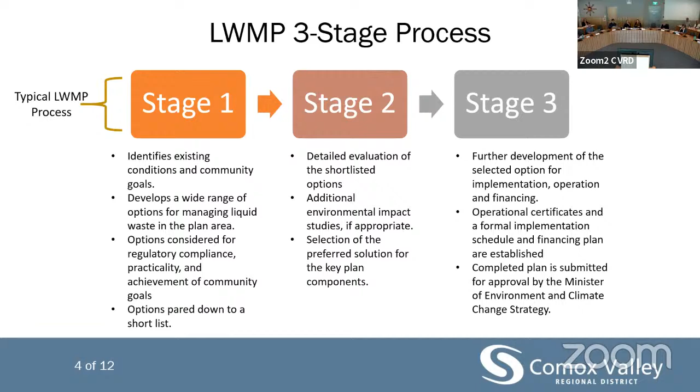All right, so if you look at the liquid waste management plan, who is involved? Who are the key role players? It's set up with 3 main committees: the steering committee, the public advisory committee, and the technical advisory committee. In a lot of cases, the public and technical advisory committees are combined and handled at the same time, like we are doing at this point, and it was also done like that for the CVSC liquid waste management plan.

So the steering committee first - it guides and receives all the information from the advisory committees and makes recommendations to the local government. On the CVSS liquid waste management project, the previous one, or the one currently underway, the steering committee was the Comox Valley Sewage Commission. And on the sewer extension south, which is this addendum project, the CVRD Electoral Area Service Committee will be the steering committee.

The public advisory committee - at the end we will discuss the terms of reference for this public advisory and the technical advisory committee, so I'm not going to expand too much on that since we're dealing with it later. In essence, the public advisory committee represents the community, the stakeholders, and the rights holders - everybody that is involved or impacted and needs to have a say. We need to hear you, understand your needs, and channel this in the right direction for the project. Then the technical advisory committee provides input on the regulatory and technical requirements - that's a lot of engineers and municipality staff involved. But again, we'll go into the terms of reference for that to give more detail.

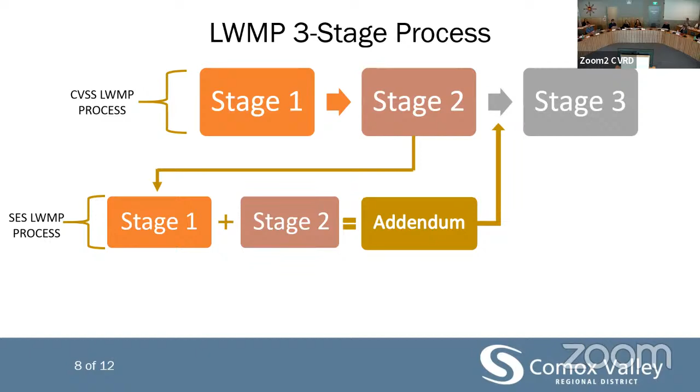If we look at this slide, stage 1 was the same up to the red line.

Now we will start with this addendum, expanding the CVSS service area to include a portion of electoral area A, and development of the addendum to stage 1 and 2 CVSS liquid waste management process, following provincial guidelines, including involvement of the TAC. Once we go through this, we move to stage 3, where we include the sewer extension liquid waste management addendum for stages 1 and 2 with the previous report, and then the whole process moves on to stage 3.

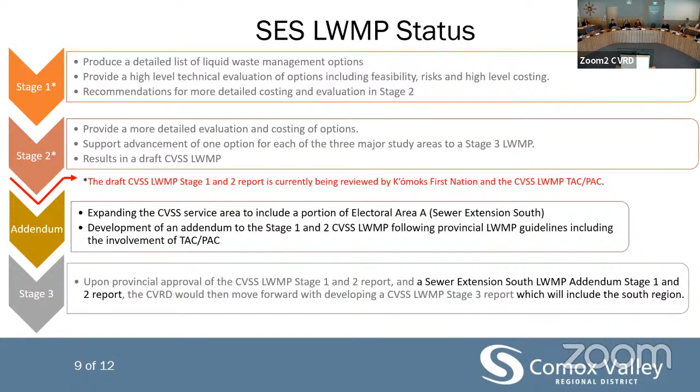In your typical liquid waste management process, there are certain components that you need to address. The guidelines are very clear on what needs to happen. There's been discussion with the ministry, and there are some items we won't cover because we are only doing a force main and a pump station. We are not doing anything on the wastewater treatment side because that has already been handled — we're busy with that separately, so it's not needed here.

So the planning components we will not discuss in this process: reclaimed water has been dealt with; combined sewer and sanitary overflows have been dealt with in the previous liquid waste management process; the wastewater treatment plant as a whole has been worked through in detail previously; same for stormwater, and the integrated resource recovery — all dealt with in the previous process. So there's no need for this, because the addendum process does not influence it. These are the only items from the ministry's whole list that we will not need to address in this report specifically.

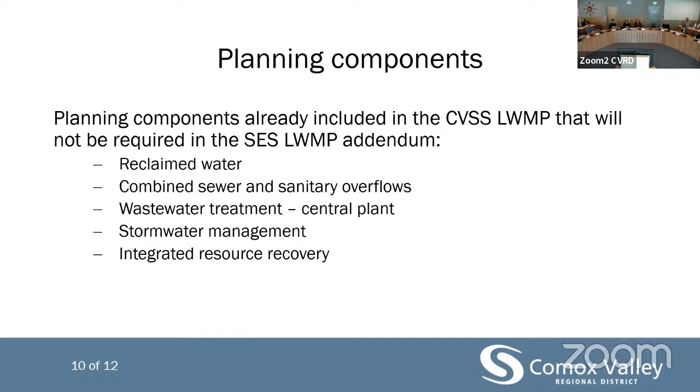I think that is my last slide on the general layout of the liquid waste management process and where we fit into the CVSS and the sewer extension addendum process.

Listen if there's any questions. Yes, I have a question. So in this addendum to the South Sewer, or the CV, whatever it is, we talk about identifying alternatives. Is that precluded from this aspect of the liquid waste management plan because it's an addendum, or are you still looking at alternatives for South Sewer?

So I can take that, Ian, if you want. Jim, as you might remember, we've gone through a previous liquid waste management process, which Mikkel will be talking about a bit today, which did identify a long list of options, and a shortlisted option was selected for servicing the south area. So we're going to build on that work and the work that's happened since, in terms of the agreement to expand the service area by the board, focusing on this concept for regional sewer service to the south. That said, we will be looking at options for how that service may be provided in terms of phasing, collection system design, and otherwise.

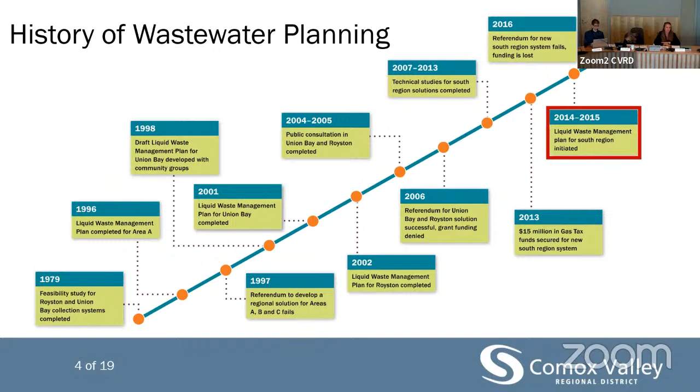In the context of a liquid waste management plan, we have to look at the applicable regulations for wastewater treatment. There's two aspects to that - a provincial aspect and a federal one. From the provincial point of view, we have the Municipal Wastewater Regulation, which came out in 2012. In addition, and a bit unique to Vancouver Island, there's also the Vancouver Island Phosphorus In-Stream Objective - specific, higher treatment levels applicable to any discharge of treated effluent into streams or rivers on Vancouver Island. Then there's the federal regulations for wastewater treatment, under the Wastewater Systems Effluent Regulation, the most recent one coming out in 2015. Now, these two regulations are similar, but not the same - there are nuances to the differences between them. The point is, whatever preferred option is established here does need to meet both the federal and the provincial regulations.

So in looking at wastewater treatment for the South Region, one of the places we start is how much wastewater are we going to be producing, over what's the design horizon for this wastewater treatment system, and what kind of wastewater strength do we anticipate.

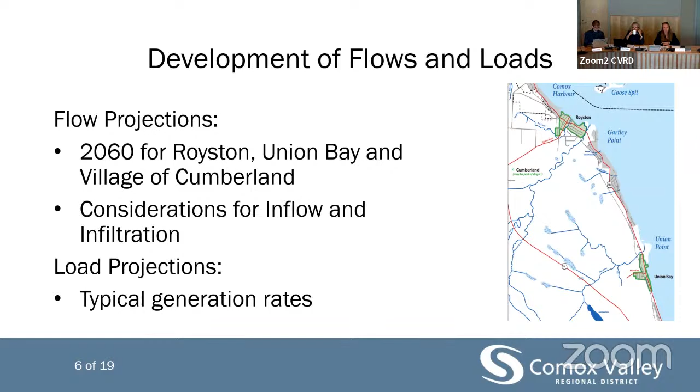In addition to that, one of the other aspects associated with the liquid waste management plan is undertaking an environmental impact study. This is typically a two-stage process, a bit confusing because it's separate from the stage 1, stage 2 process for the liquid waste management plan. The idea was to look at the different discharge options and how the environment is considered in these different scenarios. Now, the stage 1, stage 2 work was not actually carried out or completed, and I'll get into that a little bit.

But what is important to highlight is there were a number of other environmental investigations that were undertaken to support some of our options development and some of our scenario evaluations.

So like I said earlier, and you would have heard as well from Ian, a big component of liquid waste management plans are the advisory committees and the public outreach component. We did have the K'ómoks First Nation as a partner at the time. In terms of public outreach, we had 3 open houses carried out between 2014 and 2015. They included poster boards, newsletters, surveys, that kind of thing - really an opportunity to get feedback and help inform the committee. And similar to this committee here, some of you even sat on that, we had a combined TAC PAC committee, and five meetings were carried out.

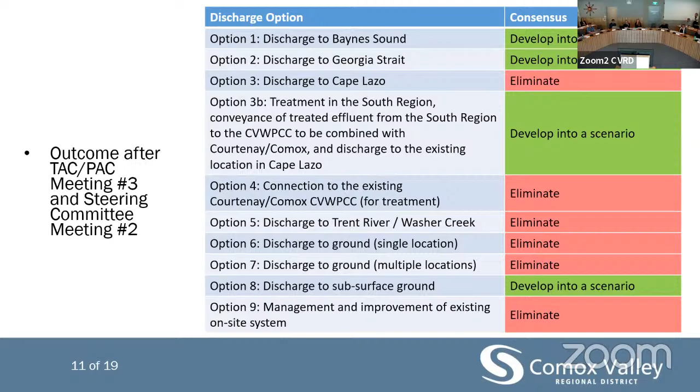Okay, I'll keep going. So like I said, we started with 9. We ended up with 4 options here. I'll just show you on a graphic where they're located.

So Baynes Sound was developed into scenario A. Then we had scenario B, which was discharge to Georgia Strait. That one goes east of the Comox Bar and just over Sandy Island Park. And then scenario C was Cape Lazo, essentially the same treatment location as where the existing outfall is from the existing wastewater treatment plant.

And then scenario D was not into any water body. It was actually still on land.

So we developed these scenarios and then we undertook what's called a triple bottom line analysis. This is a defendable approach to comparing different options. And the reason we're looking at a triple bottom line is we're considering environmental aspects, economic aspects, and social license around these options.

So for instance, from an environmental point of view, we looked at considerations like greenhouse gas emissions or disturbance to sensitive ecosystems, and how that differs between the different scenarios.

From an economic point of view, we looked at what's the initial capital cost that would be associated with a given scenario, and then we also looked at what's the life cycle cost over a certain operating time period.

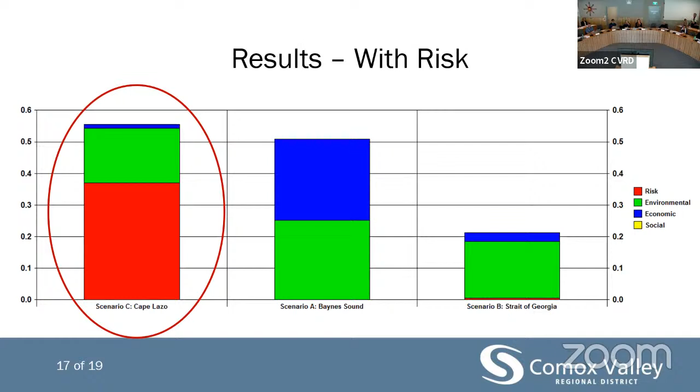Similarly with Scenario B. So what we found, through this triple bottom line plus risk analysis, was that Scenario C, discharge to Cape Lazo, had the highest score. The committee then, by consensus, decided to put that one forward as the preferred option.

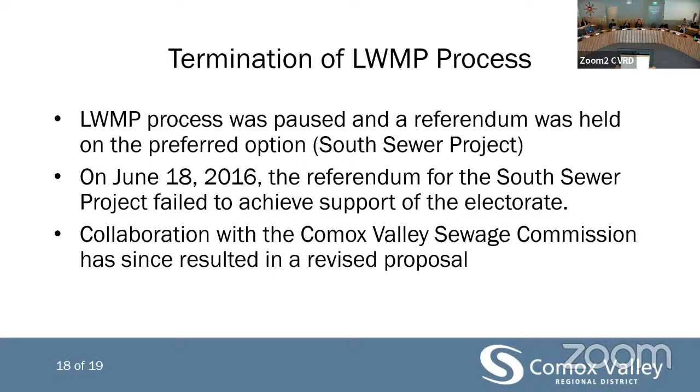So the liquid waste management plan process was paused in 2015, and a referendum was held on that preferred option, Scenario C. In June 2016, the referendum failed to achieve support of the electorate. Since then, collaboration with the Comox Valley Sewage Commission has resulted in this revised proposal, which is what WSP is working on here. I think that concludes my presentation.

Super, thanks so much. Questions? I have one question where you talked about truck traffic as being one of the downfalls of the scenario. How many trucks a day were you thinking would be leaving a South Regional facility to haul solids?

So what we found was, even though one scenario was say 5 trucks and the other was 6, the scoring skewed it so that one had the highest score and the other the lowest. The committee felt it wasn't really worth looking at the specifics of generated truck traffic. But wastewater treatment produces solids, and solids need to be taken somewhere. At the time, with the treatment being considered, solids were envisioned to be taken off-site and transported to the Skyrocket facility. If I may add, I know the current facility, Cape Lazo, is roughly 2 trucks a day servicing a considerably greater population.

So I'm just wondering where that 5 truck number came from. That was a totally made up number. I do not recall the actual estimate that we had developed at the time. Derry, I don't know if you do. Okay.

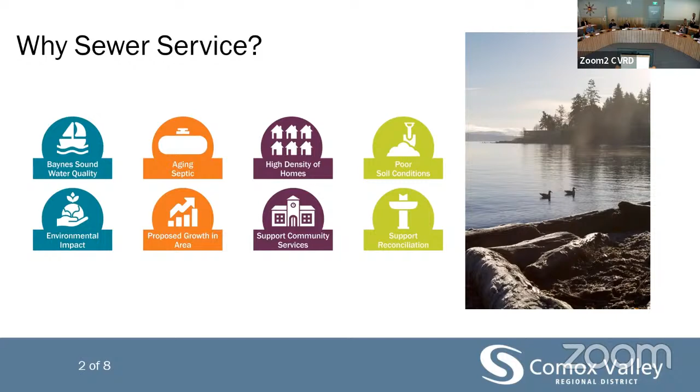In February of 2021, the CVRD and Comox ratified a community benefit agreement, which commits both parties to working together collaboratively on a regional sewer service for the area. This agreement provides for much needed upgrades to the Courtenay-Comox sewer infrastructure, while also supporting growth and economic development plans for the Comox community. Comox has and is anticipated to acquire through treaty significant land holdings in the south, and servicing these lands is very important for Comox in building capacity towards independent government.

The extension of sewer services south also supports the protection of the natural environment of Baynes Sound and will ensure safe access for Comox to shellfish for food, social, and ceremonial purposes. So, a very important project.

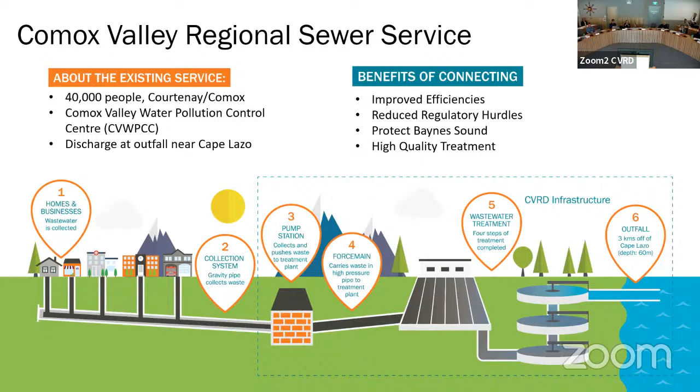As well, regional service provides access to a permitted wastewater treatment plant without a new outfall or impact to Baynes Sound, which we've heard was very important through the last process. This really simplifies permitting and authorizations for the project without the need for a new authorization for discharge, and also provides access to high quality wastewater treatment.

Just a little bit about the comparison of community sewer versus septic. For community sewer, all wastewater is collected from local homes and businesses, and in this case would be conveyed into the existing regional system for secondary treatment prior to marine discharge. Future plans for the Comox Valley sewage system also include UV disinfection, which we'll be discussing later in the meeting. There are also qualified professional operators that can be reached 24/7 and are very good at their jobs operating and maintaining the system.

For septic systems, we see varying levels of treatment with effluent returned to the ground at each property. Regular maintenance of septic systems is very important and is required through regulation. At minimum, property owners should be pumping out their septic tanks every 3 to 5 years, and for the more advanced type 2 and 3 treatment systems, annual maintenance is required. However, there's really no oversight body that's looking to ensure this maintenance is taking place.

If septic systems aren't maintained properly, they can really pose a risk to public health and the environment. The communities of Royston and Union Bay are also long established neighborhoods. Recent analysis of the health authority records showed that, like I said, many of these properties have systems that predate the early 1970 introduction of provincial septic regulations.

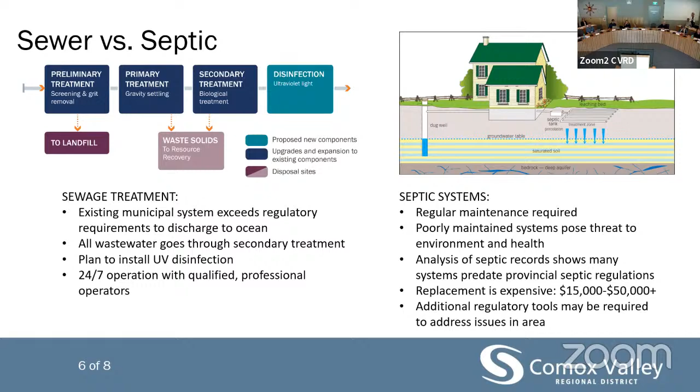So just a very quick overview of the Sewer Extension South project. Really, the intention of this liquid waste management plan addendum process is to include consideration of the Sewer Extension South project within the context of that overall Comox Valley sewer service liquid waste management plan. And as we've heard, this addendum process will be informed by this committee as well as First Nations and the public.

I know we're going to get into the details of the project concepts and the options available at the next meeting, but generally, the Sewer Extension South project includes a 13-kilometer sewer force main, shown in gray on the map, connecting Union Bay to Courtenay, as well as local collection systems and pump stations to discharge wastewater into that force main. The project is anticipated to be constructed in phases to ensure costs remain reasonable, with expansion potential for future development.

That's all I have. Questions? Derry, could you just go back to that last line?

I just have a question. Where does the current force main go to? The current force main is shown in the darker line, going essentially to West Courtenay. It currently follows the foreshore, but as we know, there's a new project underway to reroute part of that force main.

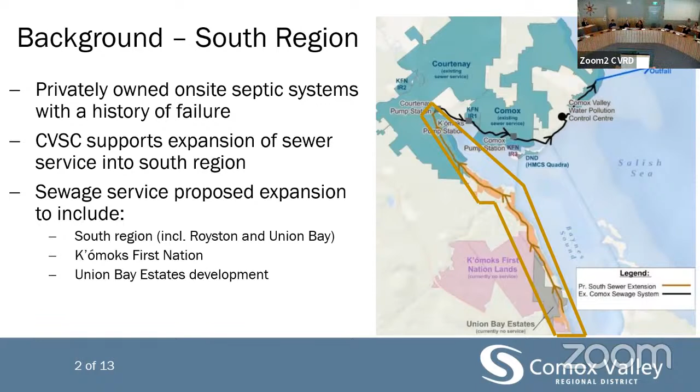All right, so if we look to start up a project, the first thing you need to know, if you don't have historic data, is you start with looking at the population. You need to go look at what the population was in the last census, or what the potential is for properties being built up, and make some assumptions on that to decide how to get to a future capacity. That's where the decision is, do we look at a 20-year horizon or a 50-year horizon? Where are we working towards? Because every time we get new information, every time there's a new census, we get more updated information.

For example, Union Bay gets an updated master plan, we know what is going on, and then we can work on it. So this is an ever-evolving system to see what your population is and what your future expansion looks like. So if you look at what we have currently, the idea on the wastewater side is to have it upgraded up to 2070. This has a 50-year design, and also just up to 2040 for the 20-year projection.

With the information we have, we looked at high, medium, and low growth scenarios spanned over the area. So we looked at Royston with historic information, Royston, Gartley, Kilmarnock, Union Bay - that was all a low growth scenario, 0.5% increase. Then there was Union Bay growth based on the McElhanney Kensington Union Bay Estate Sewer Master Plan 2019, more updated figures so we can adapt and add this information into the master plan, and that gives us the population like we see on the screen.

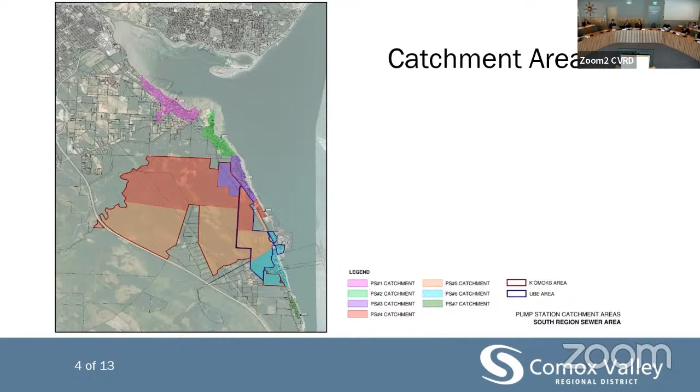All right, on this next slide, if you look at flows - touched on this previously - when you look at your typical wastewater flows, when we size a pump station or a force main, we look at a combination of these flows. The first important one is average dry weather flow, the flow we expect every day to come in. Over 24 hours, this is your flow with minimal infiltration, nothing much happening - this is your typical day, this is the flow that's coming in. That is your average dry weather flow.

Then you get a peak dry weather flow - that's the peak sanitary flow during a typical dry weather day. Every day, especially twice a day, you expect a peak factor in the morning, depending on the size of the town. If it's a small population, between 7 and 9 o'clock you'll get a peak flow because everybody wakes up, takes a shower, and you get a spike. So all of a sudden you get this peak dry weather flow. Then after everybody gets to work and showers again around 8 o'clock, depending on the area, you get another spike. That's called the peak dry weather flow.

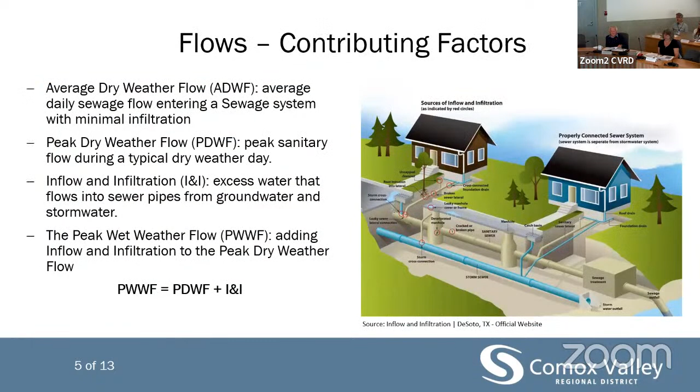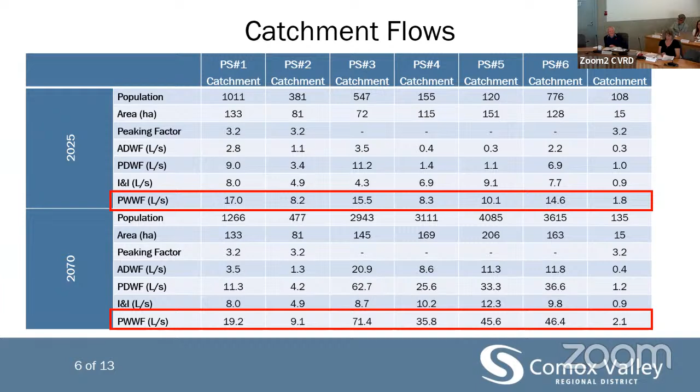On the inflow and infiltration, the ideal that CVRD is pushing very hard towards is to have a separate system. So the intensity of the rainfall should not impact the amount of inflow and infiltration, because we should have clear dirty water separation. All the rain events, the massive stormwater events, need to be dealt with on the stormwater side. We just make the minimum provision for flows into our sewage network, so that a lot of that is dealt with on the stormwater side to channel it away. We don't actually want that into our system.

And that is, once again, for the inflow and infiltration, we're only looking at a burst pipe that's cracked, or somebody that did a wrong connection, someone illegally pumping into the sewage that shouldn't be doing that. That should actually be policed better, and looked at on that side. So on the sewage side we shouldn't expect that much of a big event in terms of a flooding event.

Our pump stations should be sized at a level higher than the stormwater expected flood conditions. At this point we're looking at submersible pumps, so the sewage can still be contained within it and pumped away even though the whole area is flooded. So it's trying to prevent and minimize that.

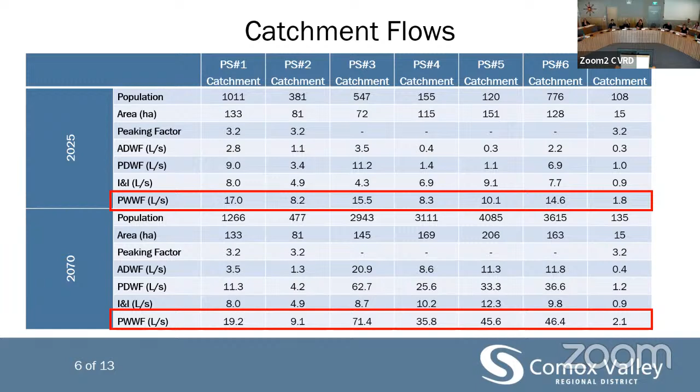All right, Ken, I was now waiting for your chemical side on these ones more. I was preparing more for questions from you on this slide, but all right. So Miguel also touched on what are we looking at a wastewater treatment site. Okay, so now we've seen the amount of the population, we've seen the flow and what provision is being made for.

Now, if we look at our wastewater treatment works, I'm first going to give you an idea of some terminology that is used. If we look at currently how wastewater treatment works, some of the main factors are its size. So you have the flow component - some of the equipment, some of the structures like your clarifiers, your physical processes, that is all sized on flow, the amount of flow we get, the peaks, all of that is sized. Then our reactor, our heart, our secondary process, that is based on the organic load. So to quantify that organic load, we look at various things prescribed by the federal government and the municipal government.

One of the terms you will always hear when you look at a wastewater treatment work is BOD5, the biochemical oxygen demand. It's basically the displacement of dissolved oxygen - a test they do to see how much oxygen is displaced. That's one of the tests. Then the other one is the total suspended solids in the wastewater, the actual fine material that you have in the water. And then there's the total Kjeldahl nitrogen, the TKN, which estimates the amount of organic nitrogen and ammonia that you have in your wastewater treatment works.

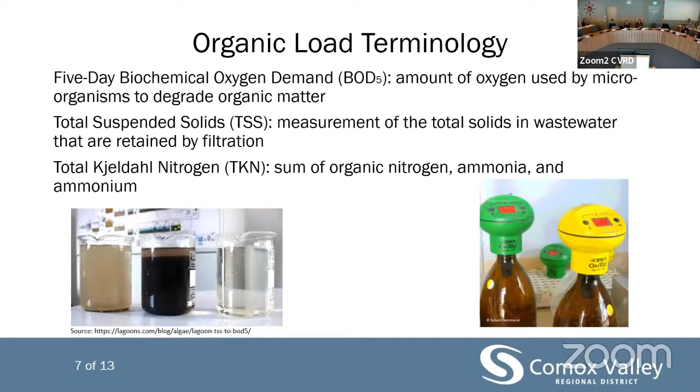So that was quite a mouthful, but our assumptions for the contribution to the wastewater treatment works are based on the CVSC's liquid waste management plan. They looked at data from 2013 to 2019, I think 2020 was also included. They looked at the average contribution of BOD - we measure BOD for each person connected to the sewage system, as they add BOD to the system. That's how it's measured.

So we measure it in BOD and TSS, and we work it back to per capita. They measured it every day for a year, got the total inflow BOD, then divided by the population to get grams per capita per day. We just used that same assumption to add it to the flow for the South region as well.

So we said, we looked at 79 grams per capita per day on average, with a maximum peak of 127 - that's just a short peak that you look for. And then the average TSS at 94 grams per capita per day. And then on the max, what's the contribution?

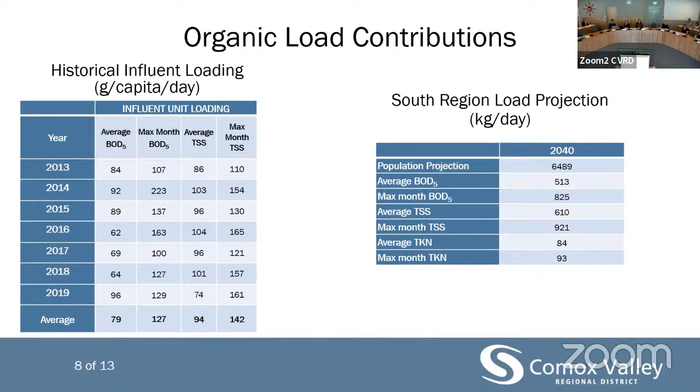Now if we look at the provisions made by the CVSC liquid waste management plan for the South extended sewer, we all worked on the same assumptions. At the point when this was done, in stage one around 2018, they didn't have all the information. So as you get more information, you update your population growth rate and all of that information.

So that's what we used. This shows what they made provision for on the conveyance system for the CVSC liquid waste management plan, looking up to 2040. Initially they made provision for 5,798 people, and our projections with an updated projected flow is 6,489 - that's a difference of 691.

So the 600 person difference in 20 years' time is very small - just assumptions we use to get that. If you look at the difference, it's about 11% in 2040 just for the south flow, but if you look at the entire system, the 60,448 they're expecting in 2040, it's only a 1.2% difference. So it's not a major difference - they were very close to the allowance at that point.

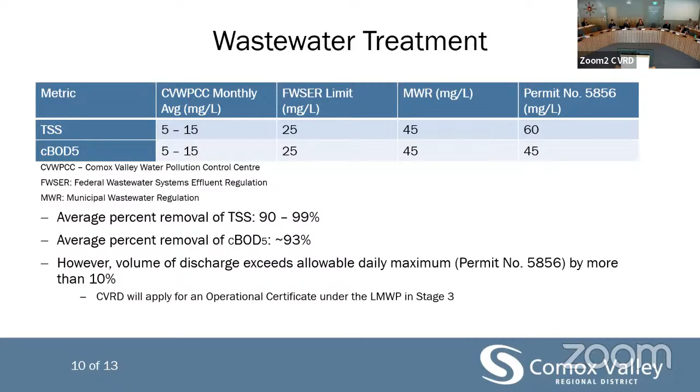All right, Ken, I haven't forgotten about your question. We will get back to that. I just want to run through a few more slides and then we can discuss phosphorus.

So what was suggested in the CVSS liquid waste management process? They looked at 4 options. On stage 1, one option was having only a bypass stream, which would produce worse quality wastewater treatment, closer to the limit but still meeting government standards. That was a non-starter.

Then option 2, which was the preferred option: take all the flow through preliminary treatment, primary treatment, secondary treatment, disinfect, and then discharge. Currently that disinfectant step is not included, so that will be the main driver of the rest.

There were additional options looked at, such as tertiary treatment, and then just a portion of tertiary treatment. But when all the factors, all the risk, all the information was on the table, this option was selected as the go-forward option.

So it was the similar system that we have on site. It might need, in the next few years, to be upgraded to accommodate the larger flow and more population, but the process system will stay the same with the additional contribution of disinfectant. They looked at various disinfectants and decided on UV at this point.

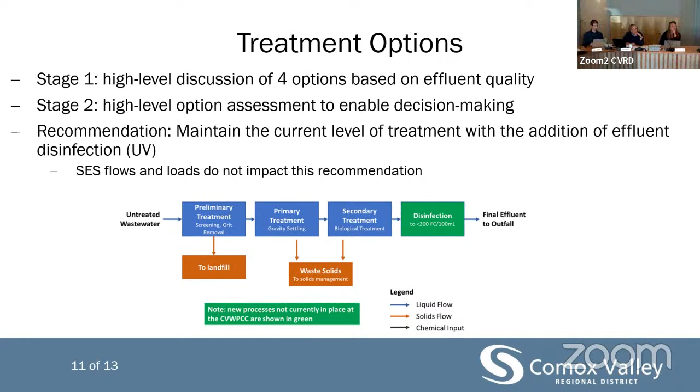Ian: could I interject, I wanted to know from Ken, does that respond to your question? I also wanted to add, having witnessed the discussion at previous TAC meetings regarding the level of treatment and the final decision to recommend disinfection, that they really wrestled with this. It was a serious and thoroughly considered set of options.

A strong recommendation from the TAC in the end that this was the way to proceed. I wanted to ask Mark or Derry if they had anything to add about the final recommendations in the previous phase regarding the treatment plant options and where they landed. Maybe Zoe, would you mind coming up and offering a little bit of a summary as well?

I hope you don't mind, Ian, but I just thought we should deal with this head on. Thanks everyone, I'm Zoe, a project engineer at the CVRD, and I work extensively with Mark and Chris on the core area liquid waste management plan. We did look at 4 options as summarized, and there was significant discussion and evaluation into those options.

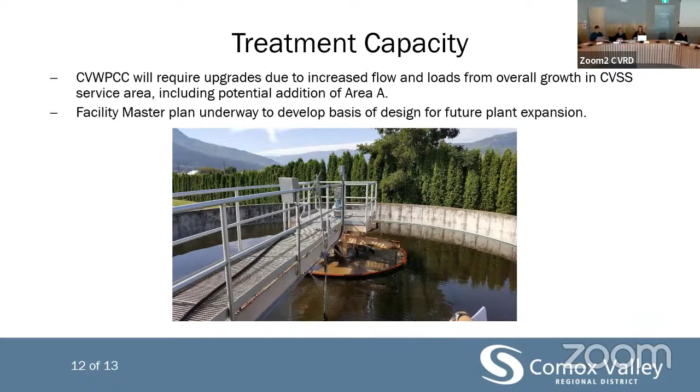So as part of the master planning, they are looking at that for the future expansion. Just know that it is in process, and it is close to being finalized, that facility master plan. So they take note of the new flow. Zoe, do you have any more details to add on the facility master plan for everyone? Maybe some timelines?

So yeah, the facility master plan is underway. It's a two-phase process. The first phase of the plan is looking at options for secondary treatment. As I mentioned earlier, our plant is a conventional activated sludge treatment plant facility, and there's more than one way to achieve secondary treatment using different technologies. So as a start, we looked at whether conventional activated sludge makes sense, and whether it fits on the site, because we're looking at a 50-year timing window. It checks those boxes, and operationally there's a lot of benefits to sticking with what we already know. So the new upgrades at the plant will continue with conventional activated sludge treatment.

Now that we've made that decision, we'll be proceeding with phase 2 of the work. That looks at siting on the plant and the facility - where do we put the new clarifiers, where do we put the new bioreactors, and the staging of when we need those. What's the threshold for flows and loads for our next bioreactor, our next primary clarifier? The intent of the plan is to give us a 50-year planning horizon that looks at flows, loads, and when we need what and where it goes.

That's the point - also looking at optimizing and maximizing the use of our existing infrastructure. We already have 3 trains, and we'll be looking to mirror that. What can we use and how long can we use it? What's the condition? It's all part of that.